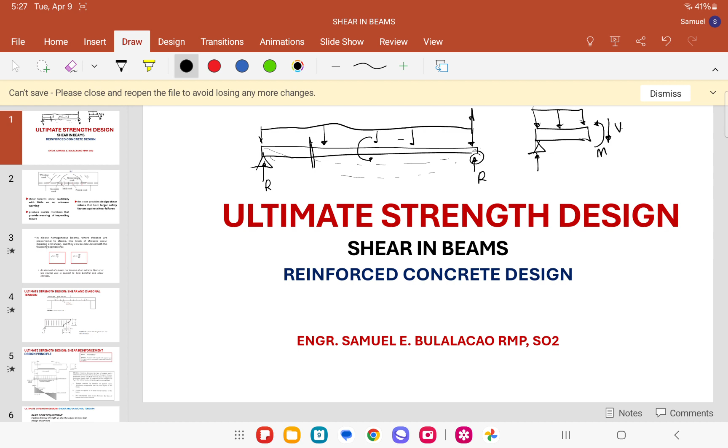So the beam must be designed for both types of forces to carry the load safely. So yung kino-consider nating una is yung flexure, no? So the reinforcement or the main reinforcement is a must to design. So next na lang dyan is yung additional reinforcement or the shear reinforcement. So yung shear failure natin may occur if wala tayong reinforcement or yung stirrups.

Ano ba yung stirrups natin? So kung meron tayong beam, meron tayong main reinforcement dito or main bars. Yung stirrups natin yan yung bakal na naka-yakap sa main bars. Ito na yung tatawagin nating shear reinforcement.

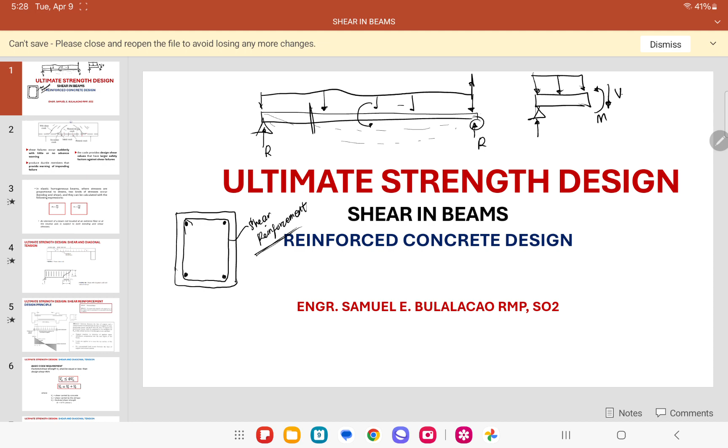So para di tayo mag-fail sa shear, kailangan nating i-design yung shear reinforcement. So paano naman nakakatulong itong shear reinforcement na to sa pag-resist ng shear loads? Check natin dito, tingin. So meron tayong... dismiss muna natin ito.

So meron tayong load na VU acting downward or V na shear load. So walang ibang mag-resist ng loads kundi yung mismong concrete, no? Tapos yung shear reinforcement. Bakit ko nasabing shear reinforcement? Kasi tingin dito, so we have yung shear natin is parang downward lang siya nag-act, no? So meaning kailangan may mag-resist na upward force. So itong bakal na to, ito.

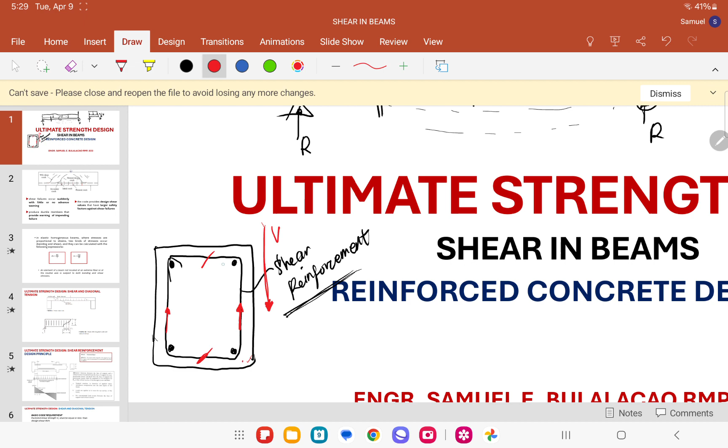So kapag hindi lang natin nakikita, pero may force yan na nag-resist dito. So meron tayong dalawang force, para mapigilan niya yung pagpunit nito, no? Para hindi maghiwa-hiwalay yung mga bakal na to. Kaya malaking tulong yung shear reinforcement natin.

So it is important to make certain that the design for shear must ensure that the failure does not occur before flexural failure. So dapat hindi mauna yung failure ng shear sa failure ng flexure. Yan, i-discuss natin with the help of NSCP 2015.

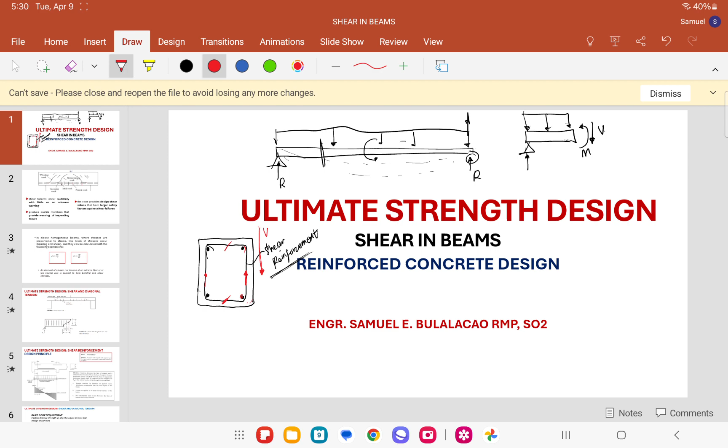Next, shear failures occur suddenly with little or no advance warning. Produce ductile members that provide warning of impending failure. The code provides the shear NSCP, there are safety factors against shear failures. So as you can see, meron tayong mga shear cracks dito na based from the laboratory, no?

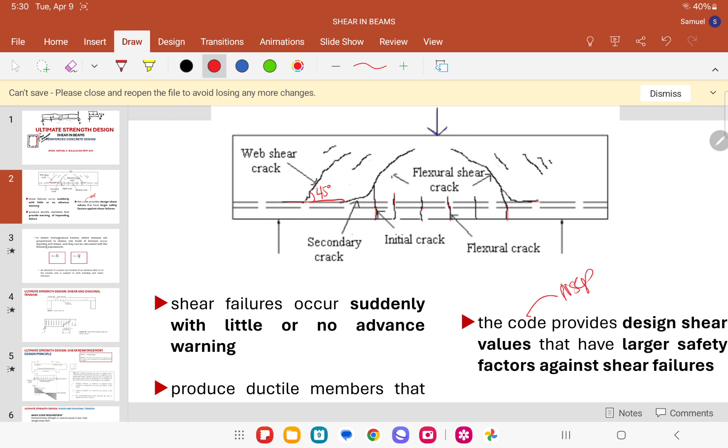Sabi 45 degrees daw yung cracks na to, no? Meron tayong web shear cracks, flexural cracks. Next, in elastic homogeneous beams where stresses are proportional to strains. Two kinds of stresses occur: we have the bending and the shear.

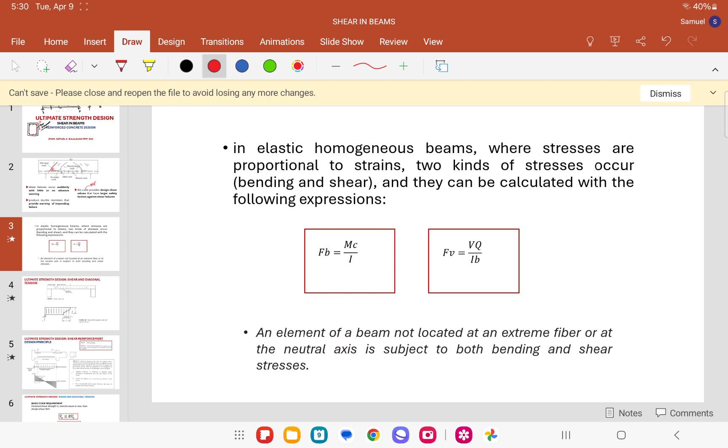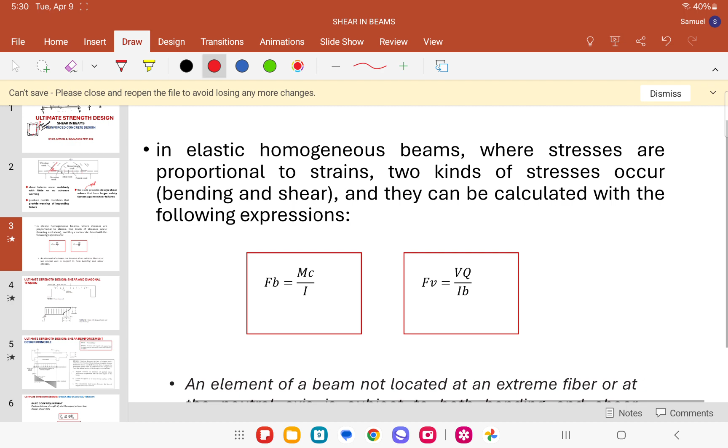So from your mechanics, we have the formula of bending na FB is equal to MC over I, or bending stress. But then we also have the shear stress na VQ over IB. So an element of a beam not located at an extreme fiber or at the neutral axis is subject to both bending and shear stresses.

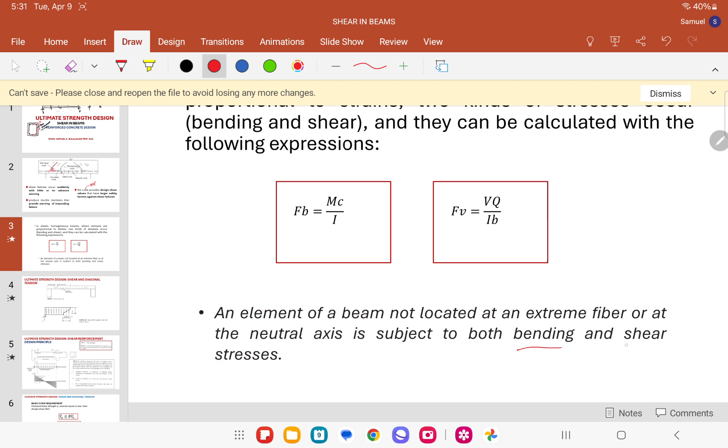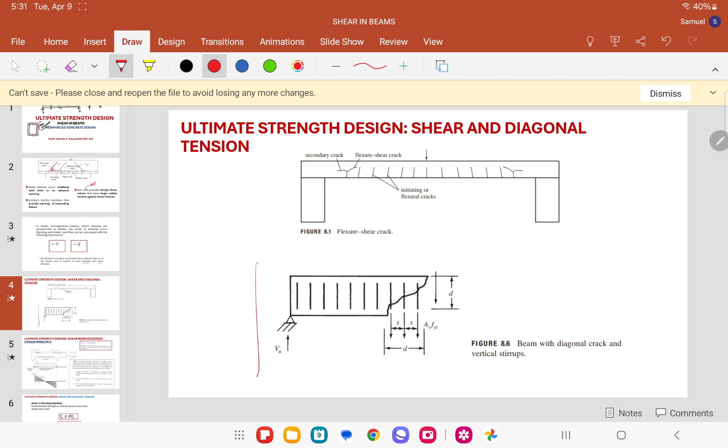So ito yung example ng flexure shear crack natin. So ito naman, example naman natin sa baba is the beam with diagonal crack and vertical stirrups. So yan.

May ano ata, sabi na. Hindi kasi siya ma-play. Ako na lang mag-play mamaya.

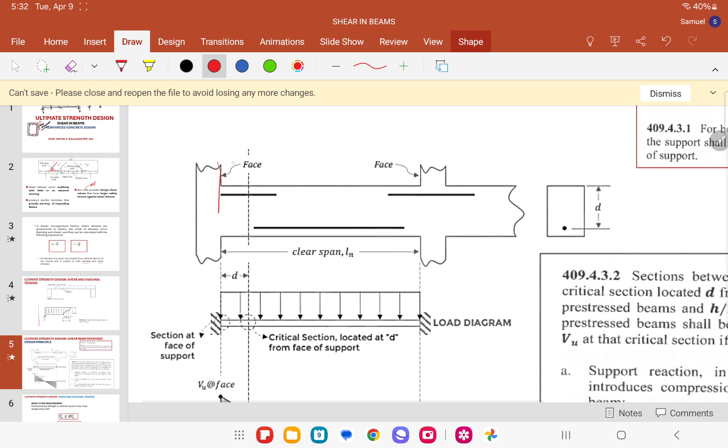As you can see in this figure, sabi dito sa NSCP natin, we have the factored shear. For beams built integrally with support VU, at the support shall be permitted to be calculated at the face of the support. So let's say na meron tayong beam na meron tayong support na columns. So of course yung columns natin merong face, so pwede nating masabi na meron ditong shear force at face.

So wherein, ang sabi, yung critical section natin is located at D from the face of the support. At itong D na to, di ba yan yung effective depth? Kung gusto nyo makuha yung critical shear force natin, kailangan lang natin kumuha ng distance ng D from the face. Tapos kaya natin mas compute na yung VU crit niya.

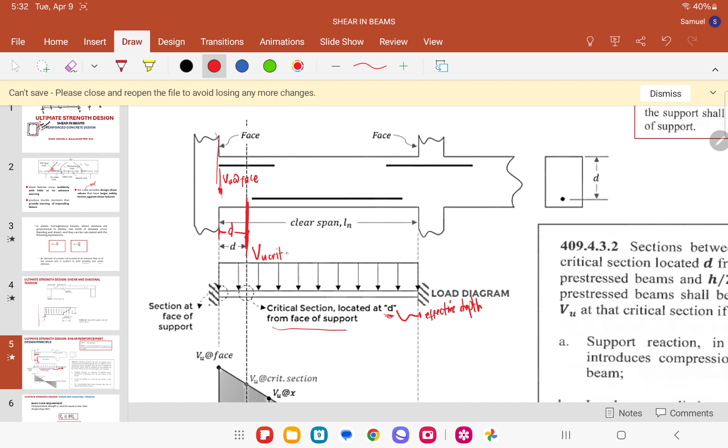Okay, so ito yung ganito yung itsura ng shear diagram natin. So meron tayong upward force dito sa may face since meron tayong reaction dito, no? Tapos 0 sa may gitnang part since wala na dyan load, no? So yung shear diagram niya is pag ganito lang.

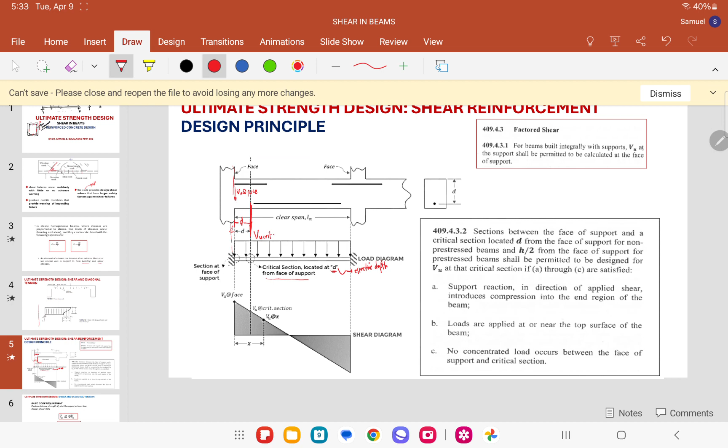So the section between the face, ito na yung sinabi ko sa inyong distance D. So lipat natin to dito. Wherein, ito na yung main equation natin.

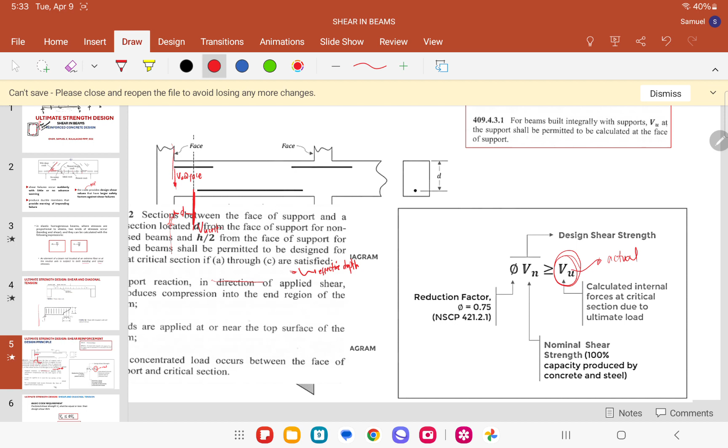We have the VN is greater than or equal to VU. So yung actual natin must be less than sa capacity or theoretical capacity natin. Kasi yung capacity, kung lalagpas tayo sa capacity natin, mag-fail na yan, no?

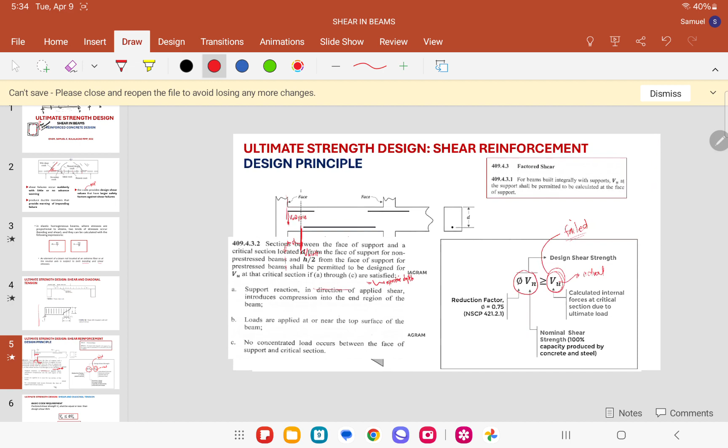Tama, so kunyari, yung kaya mo lang palang buhatin is 10 kilograms. So ang hina mo naman, no? Kaya mong buhatin is 10 kilograms, yan yung actual mo, ayun yung capacity mo pala. Tapos pinabuhat sa'yo is 11, so mag-fail ka na. Ganon yung analysis, okay? Ito na rin yun.

From NSCP, we have the basic code requirements. VU shall be equal or less than the design shear or the capacity, VN. Ito yung actual, ito yung capacity, ganito lang yun lahat, no? Pati yung MU natin must be less than or equal to the MN. So lahat. Wherein yung VN natin is equivalent to VC plus the VS.

Wherein yung VC natin is the shear carried by the concrete or the shear force carried by concrete, so it is in kilonewton. And also VS natin is the shear carried by the stirrups, it is also in kilonewton. So bakit itong dalawa? Kasi nga, di ba, kapag may beam tayo, ang magbubuhat lang ng shear natin is yung stirrups and then yung concrete mismo. Kaya pag pinagsama silang dalawa, ito na yung capacity niya.

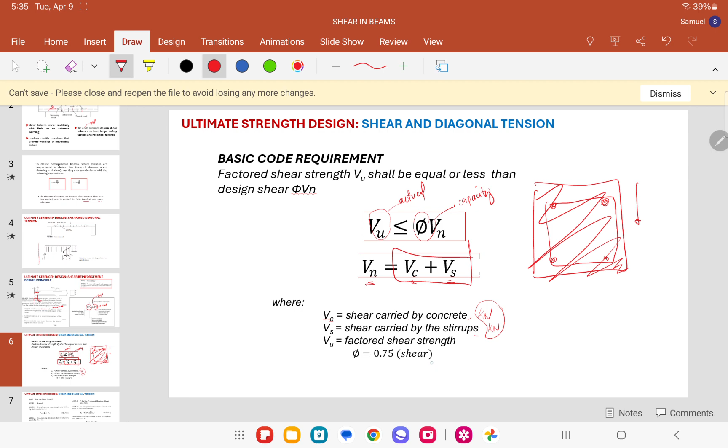Wherein yung VN is the nominal shear. Tapos yung phi natin is constant, we have phi in shear is 0.75. So we have here codes excerpt from the NSCP 2015.

So same lang ito, ito nakalagay nung kanina. So we have cross-sectional dimension shall be selected to satisfy the equation. So ito, kung makikita nyo, VC lang din siya. Tapos ito yung VS, no? VC plus VS.

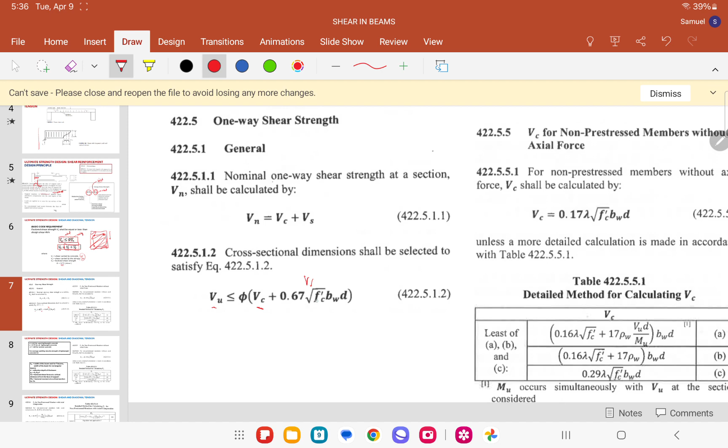0.67, o kapag minsan, 0.67 is equal to 2/3 also. Sa ibang book, 2/3 yung ginagamit. Sa NSCP, 0.67, so kahit ano dun.

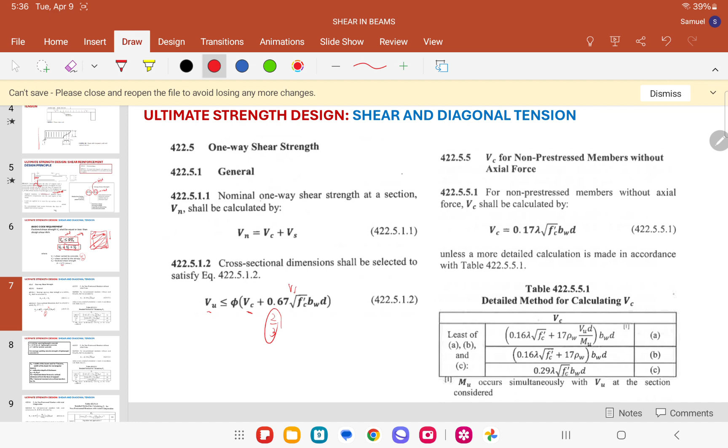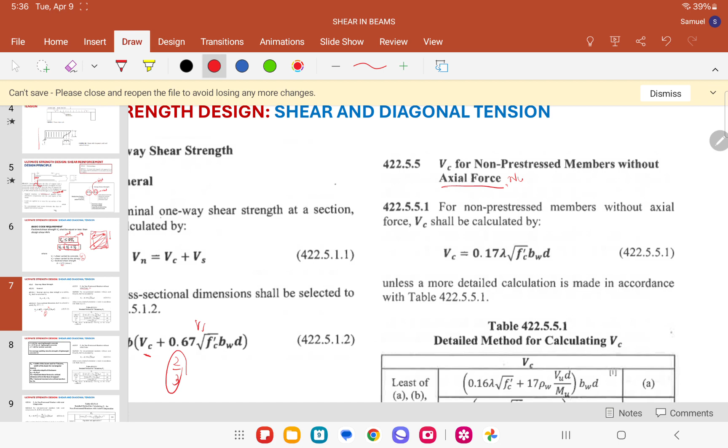So next, we have the VC for non-pre-stress members without axial force, NU. So yung axial force natin is kung meron kayong beam, dito naman siya nag-act mismo. Axial, parang normal.

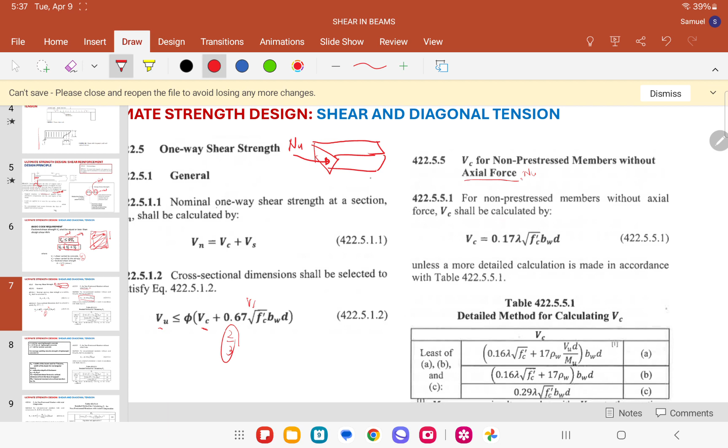So yung VC natin, shear strength provided by the concrete, we have 0.17 lambda FC prime BWD. For simplified naman to, kasi meron tayong next equation na detailed method for calculating VC. Sa kung may mga given kayo na VU and MU, ito yung gagamitin natin. Okay.

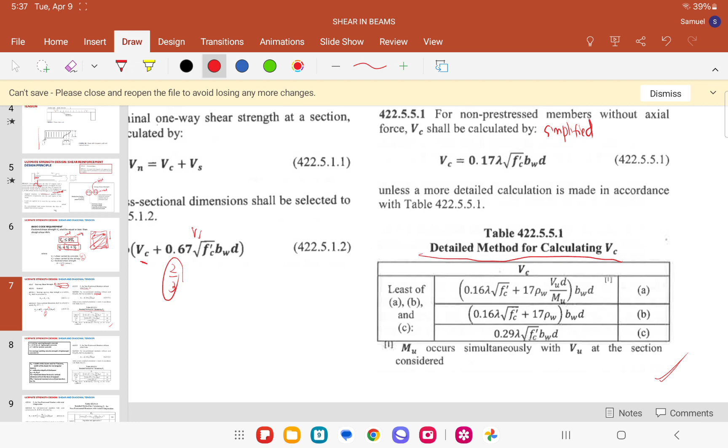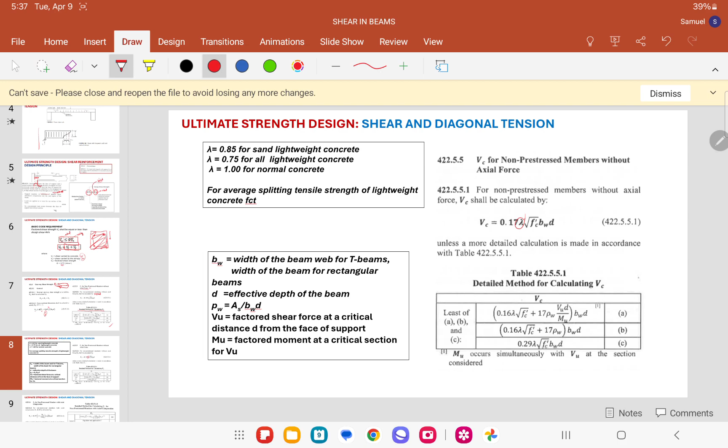So check nyo na lang. Wherein, yung lambda natin, ito, is equal to 0.85 for sand lightweight concrete, 0.75 for all lightweight concrete, and then 1 for the normal weight. So most typical na ginagamit natin sa lambda is just 1. So medyo nalimutan lang to, pero ito 1 lang kapag normal weight.

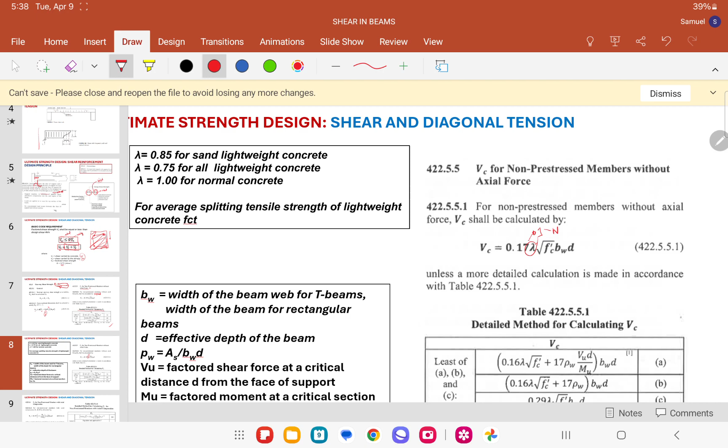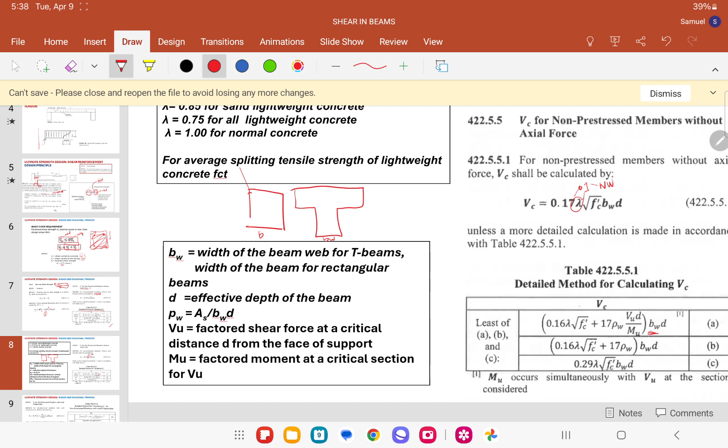Also, we have here the BW. Ito, kahit BW siya kasi naka-general yung equation natin. So pwede natin sabihin na pwede natin gawin na itong B natin sa rectangular, di ba? B lang siya. Pero kapag minsan kasi may mga instances na yung given natin is in T-beams. Kaya bini-BW siya, so equivalent lang naman yung BW tsaka B.

So and then we have the rho W, or kasi yung rho W natin is yung rho natin is AS over BD. So kaya nga naka-general W, so paglalagay tayo ng W dito. VU, factored shear force at critical distance. MU, factored moment at a critical section VU, ito, MU.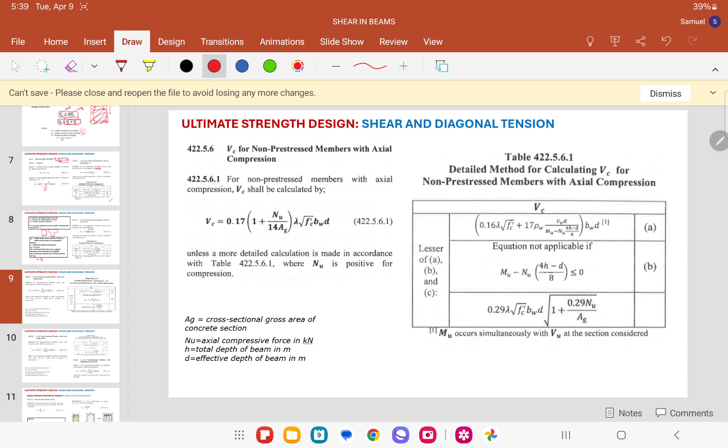So next, with axial naman tayo. So pag with axial, magdadagdag lang tayo ng NU, no? Axial compressive force. Ito na yung gagamitin yung formula.

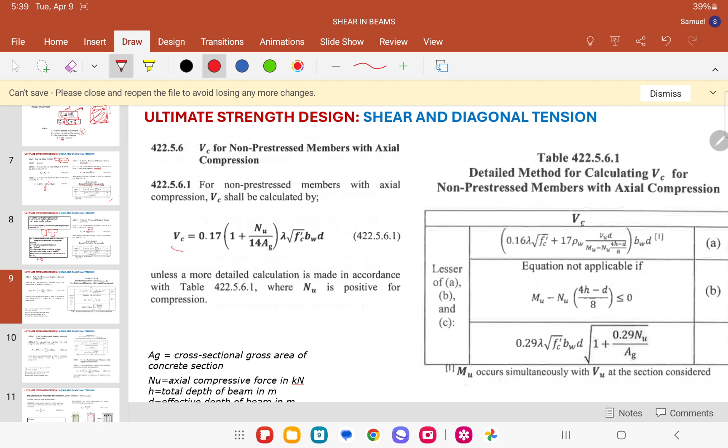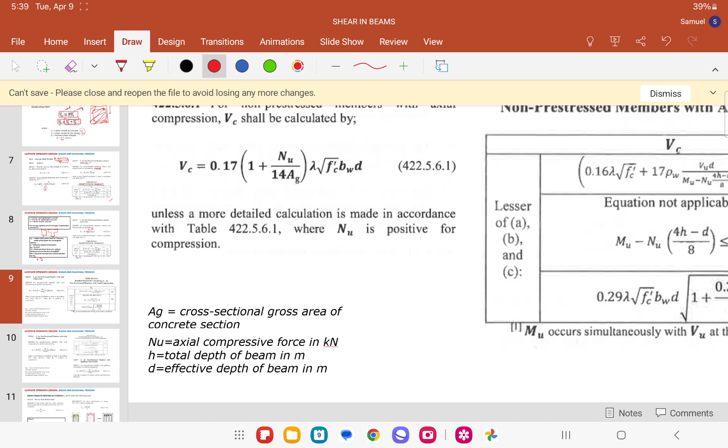Mostly hindi naman siya nakikita since sa beam natin is hindi naman parati may axial. Dito, NU is positive daw po for compression. So kapag given is tension, kunyari tension ay 10 kilonewton in tension, ilalagay nyo dito is negative 10.

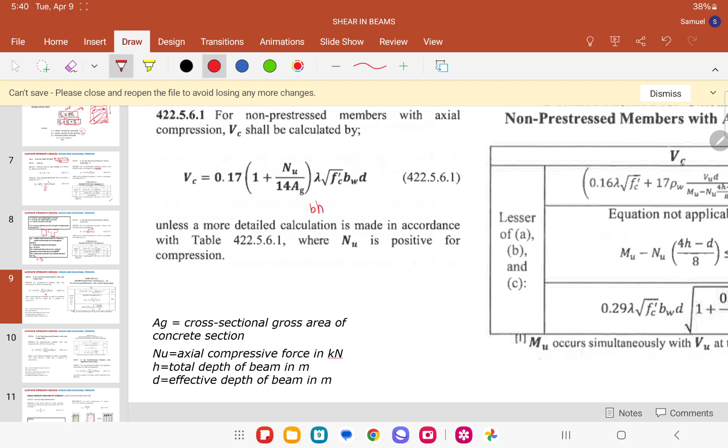We also have the AG, wherein yung AG natin is the cross-sectional gross area. So kung meron kayong width, hindi nyo i-multiply siya sa effective depth, no? Dapat sa H para maging AG siya. Tapos for detailed naman, ito yung simplified, tapos ito naman yung detailed. Same lang naman yung gagawin nyo, medyo mahaba lang ito.

We also have here VC for non-pre-stressed members with significant axial tension.

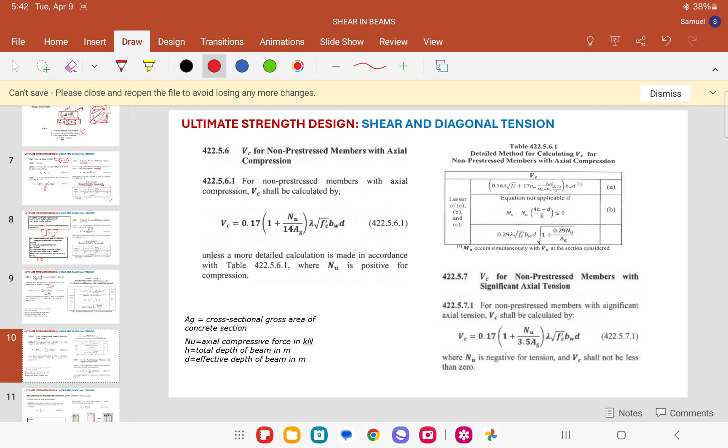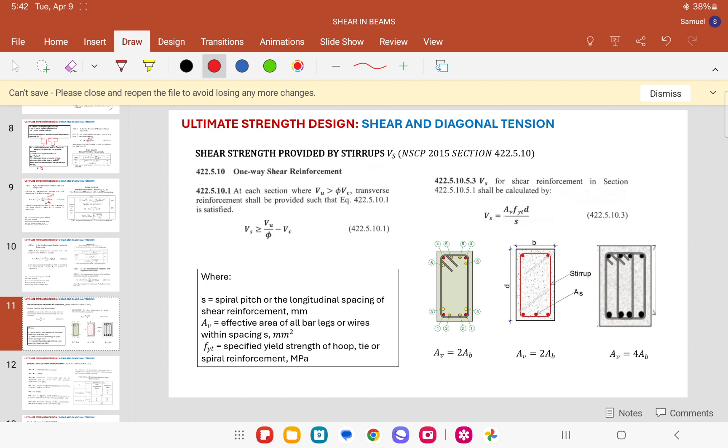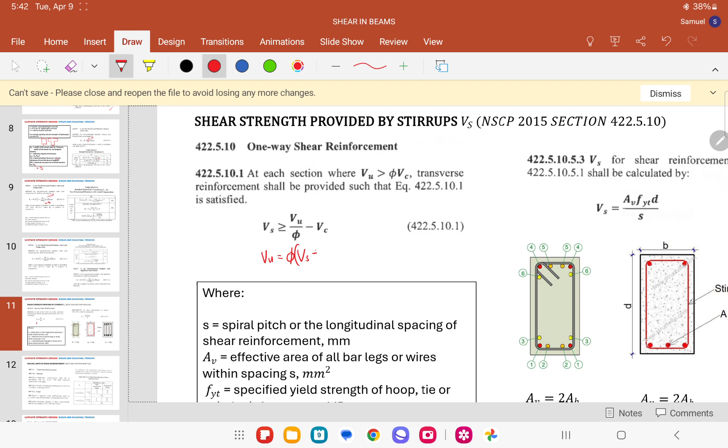Next, we have here the shear strength provided by these stirrups, wherein meron tayong formula ng VS na must be greater than or equal sa VU over phi minus VC. Ito galing lang siya sa VU is equal to phi VS plus VC, na lang na simplify.

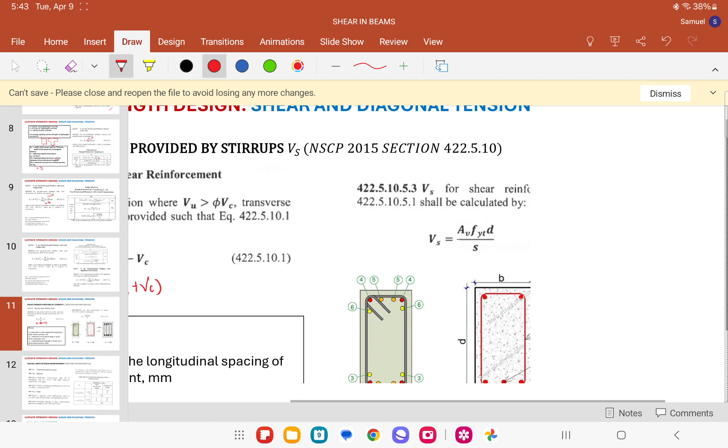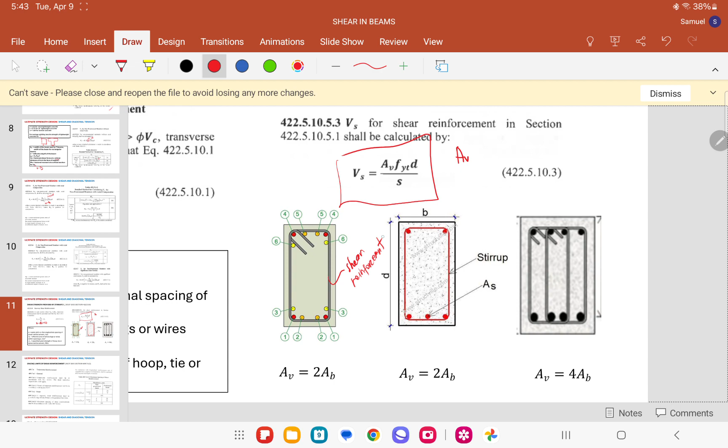Tapos meron tayong shear reinforcement. So you have the VS is equal to AV, FYT D over S, wherein yung AV natin is the area of this shear reinforcement. Yung area niyan is just the diameter area of these bars.

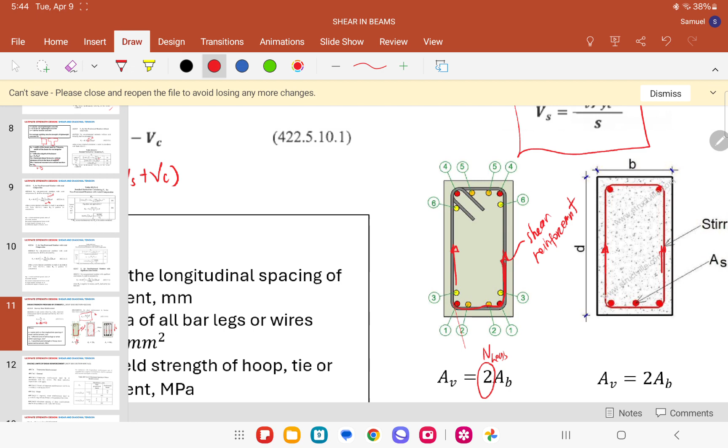So ano tong 2 na to? Yan yung number of legs natin, kasi di ba dalawa yung magkikerry. So dito magkano? Dalawa din. Kung dito naman, ilan? 4. So since meron tayong 1, 2, 3, 4, meaning yung number of legs natin, may check tayo kung parallel yung load. Yung parallel na number of bars, yan yung pipiliin natin. Kung pag ganito naman yung VU natin, sige, siyempre dalawa lang, 1, 2. Pero normally ganito yung tsura niyan. Pag hindi given, hindi sinabi sa problem, automatic dalawa yung pipiliin nyo.

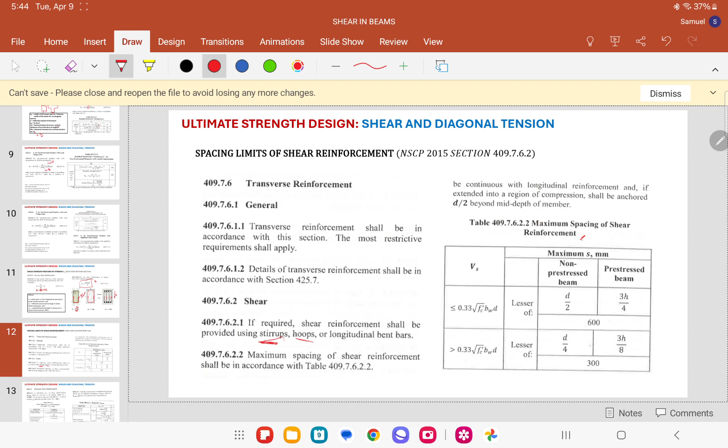We also have spacing limits for shear reinforcement. If required, shear reinforcement shall be provided using stirrups, hoops, or longitudinal bent bars. Meron tayo dito maximum spacing for shear reinforcement, ito yung VS natin, shear strength provided by these stirrups.

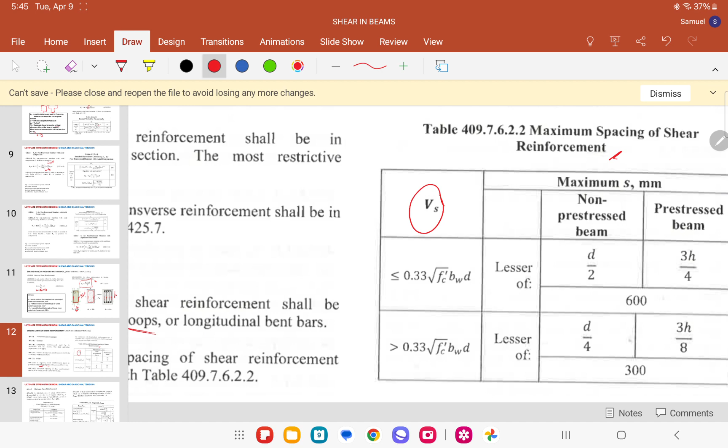Kapag less than, hindi pa naman malakas yung shear strength natin. Diba sa mga nakita na kayo ng mga construction site, naglalatag na sila ng beam. Kunyari ito yung beam, sa part na to masinsin yung pagkakalagay ng mga stirrups, until sa mga gitna siya magluluwag siya.

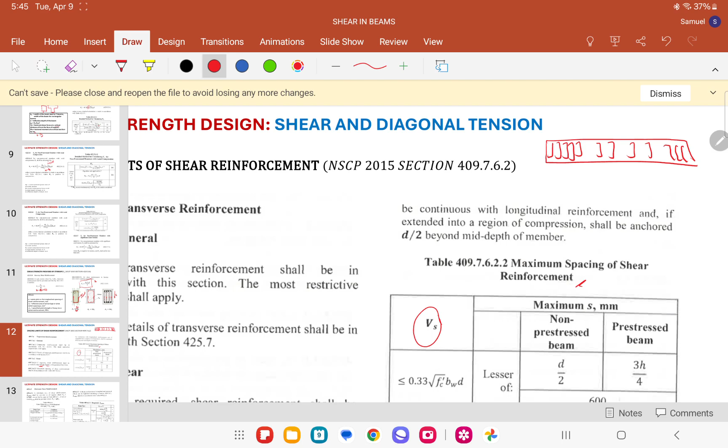Bakit kaya? As you can see, mas maganda kasi kapag mas malaki, di ba? Nakita nyo kanina yung shear diagram. Saan na yun? Shear diagram, where are you?

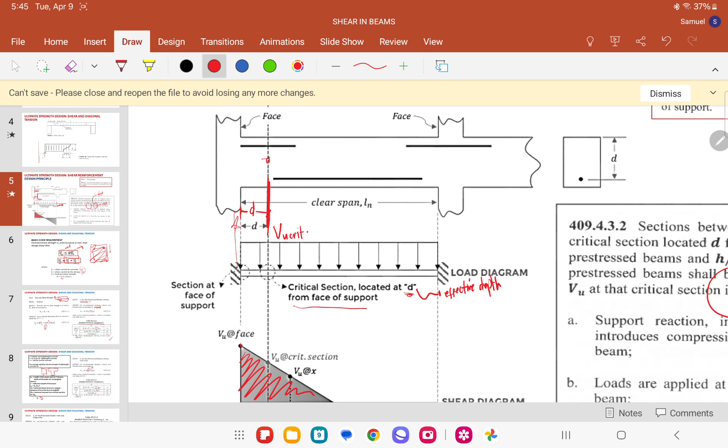Nakita yung shear diagram natin, sa may part ng face is mas malaki yung loads niya, no? Kaya kung naandito siya, yung stirrups natin dito is magkakadikit, parang pag ganyan siya, hanggang maggitna siya nagluluwag siya kasi dito wala naman nang shear force. Ang ibig sabihin, kapag mas malaki yung shear, mas maganda if mas masinsin or mas dikit-dikit yung pagkaka-spacing nila.

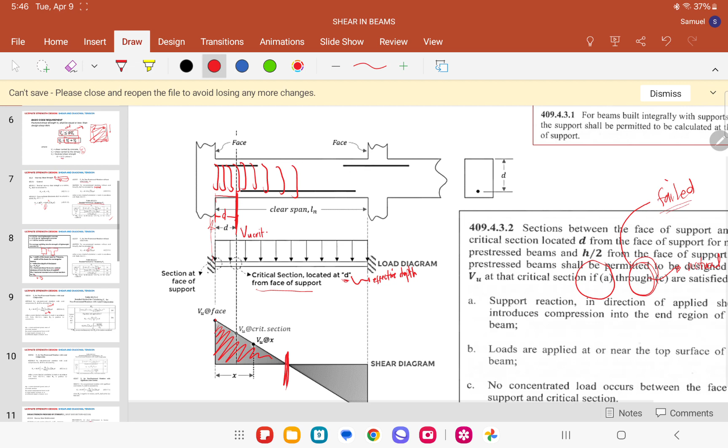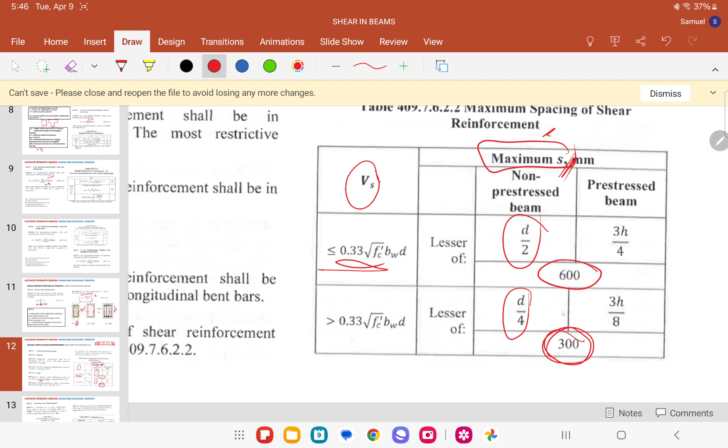Kaya dito, kapag less than, mas maluluwag yung spacing natin or the maximum S. Kapag malaki naman, dapat yung spacing natin is liitan natin, dapat hindi tayo lalagpas dito, ito yung maximum na. So kung may mga compute tayong theoretical na spacing natin, kapag lumampas siya dito, automatic, ito lang yung magpipili na lang tayo dito sa dalawa.

Wherein meron tayong shear reinforcement na ito, minimum shear reinforcement, required Av,min. For the minimum, ito na yung gagamitin natin, greater of these two sa Av,min, over S siya, no? Pag nilipat natin, pwede na ilagay dyan.

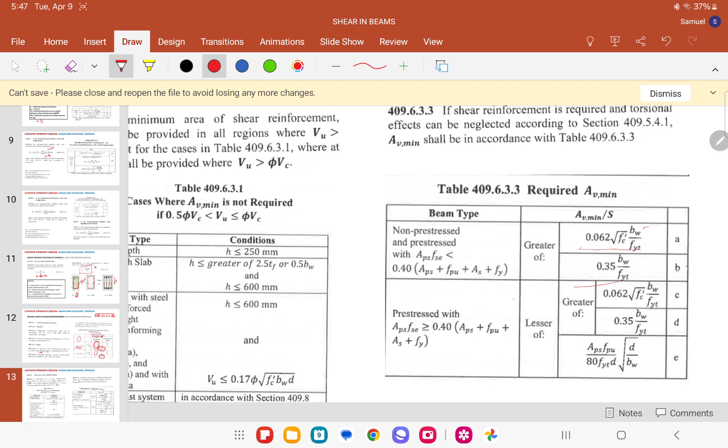Okay, so meron tayo ditong steps in vertical stirrup design. Paano natin ma-compute yung S? Parang ganun, kasi sa mga problem na to, S lang yung mostly na kinocompute natin.

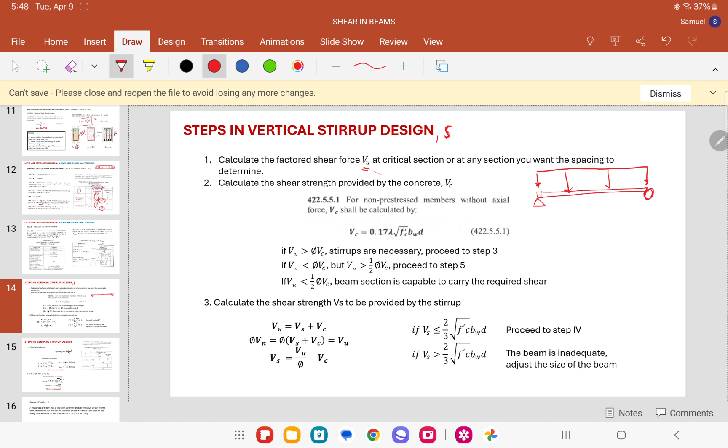First, calculate the VU, shear force VU. To calculate, kunyari may binigay sa inyong beam, simply supported, tapos meron daw W na load dito or W na naka-factored na siya. Kailangan nyo kasing ma-compute is factored shear force VU, at critical section. Di ba sabi ko kanina, yung critical section is from the face of the support, from distance D, yan na yung VU natin.

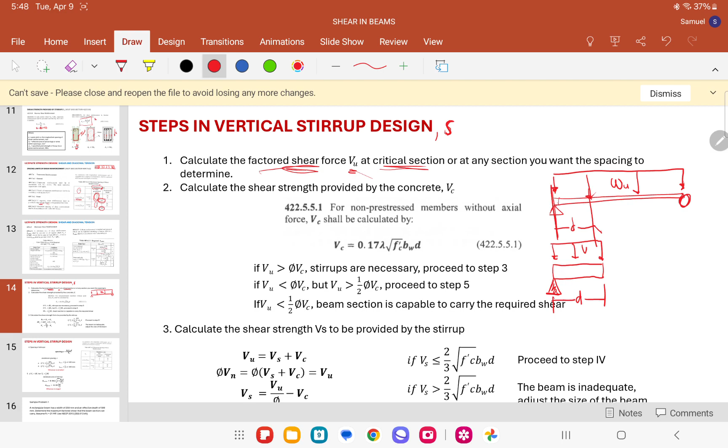Meaning, magkakat tayo dito ng beam na may distance na D. Kunyari may load ka dito, tapos naandito na yung shear force mo, VU. So of course dito, meron tayong reaction, kailangan nyo din i-consider yung reaction dito.

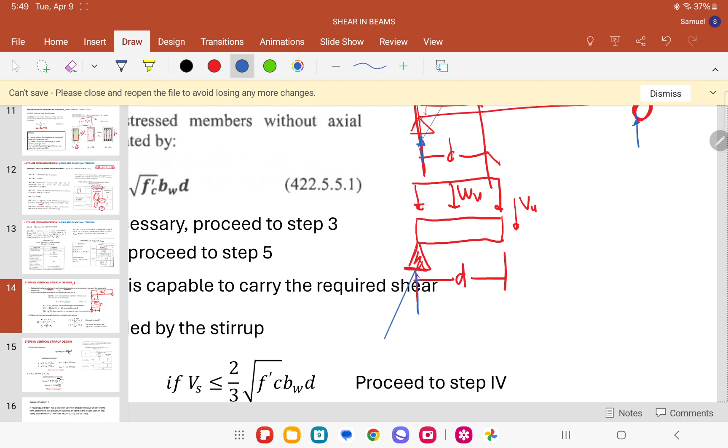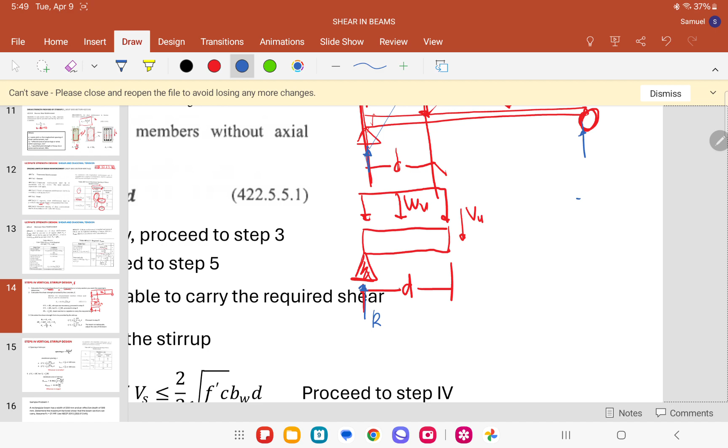To compute for VU, summation of forces, vertical. Ano ba ang nangyari dito? Summation forces, vertical.

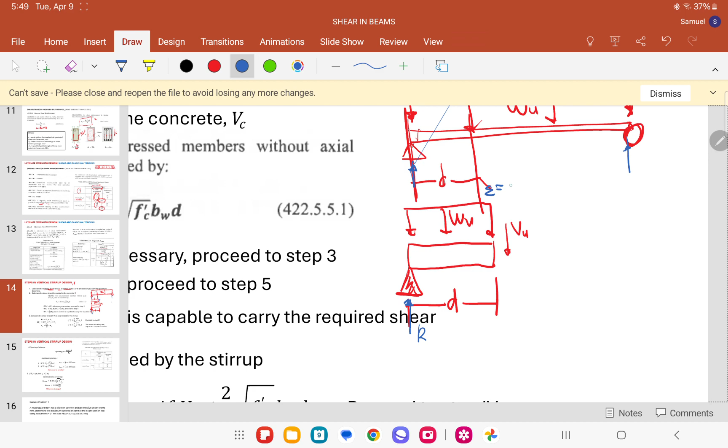Saglit lang ha. So, we have the reaction na upward minus yung VU natin na downward, tapos yung uniform load na Wu times d equal to 0. So, of course, yung R niyo o yung reaction niyo ay makukumpleto niyo naman, no? So, with this, given na siya, ito given naman, VU na lang ang matitira. So, make sure lang na factored yung given sa inyo.

Kapag hindi factored, you may use 1.2 DL plus 1.6 LL, for 2015 yan, no? Yan, erase natin.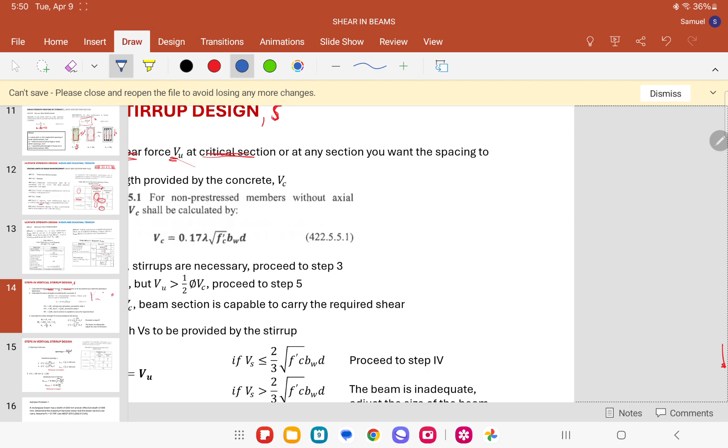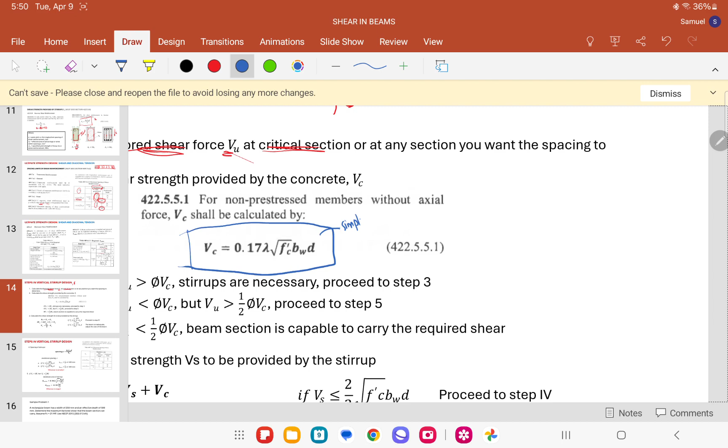Next step is to calculate the shear strength provided by the concrete. Kapag hindi sinabi, ito na yung gagamitin niyo, wherein ito yung simplified. Tapos may condition dito, compare niyo lang yung VU niyo sa value ng phi Vc.

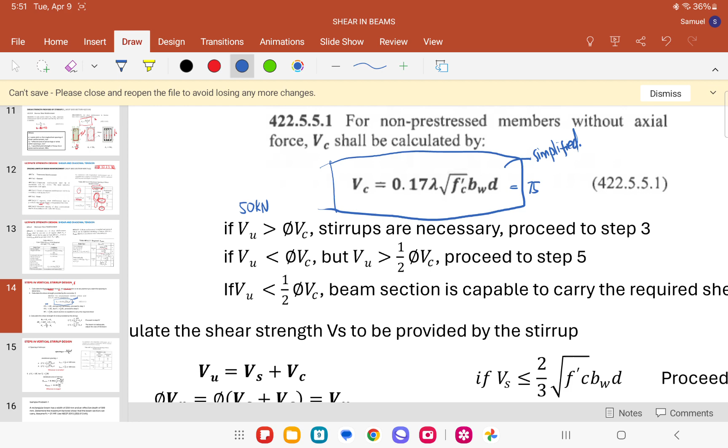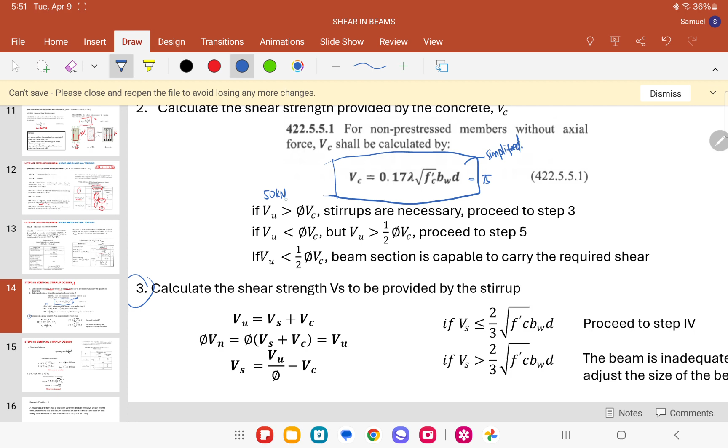Kapag nag-less than naman siya sa phi Vc, so mag-check din kayo muna ng 1/2 phi Vc. Kapag greater than, yung VU niyo sa 1/2 phi Vc, proceed kayo sa step 5 na nasa next slide. Kapag less than naman siya, kayang-kaya niya na daw i-carry yung shear natin. So, medyo mababa lang yung shear force kapag mga ganito.

So, next, calculate the shear strength Vs provided by the stirrup, wherein ito na yung formula natin.

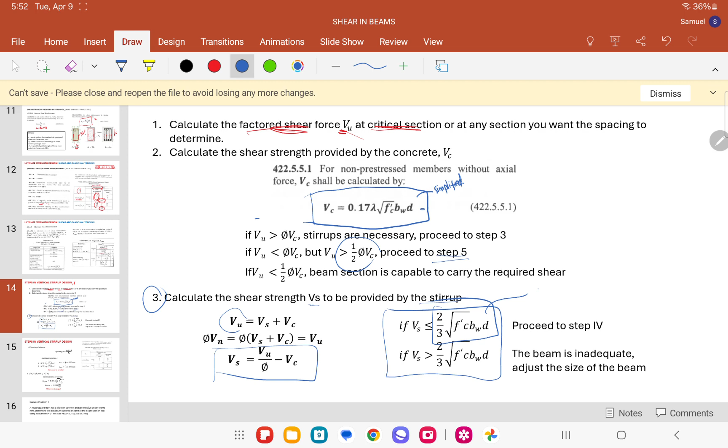So kapag na-compute na tayo ng Vs, kapag hindi given yung Vu natin, kunyari hinahanap natin ay Vu, kukuha tayo ng formula ng Vs galing dito. Ito na yung theoretical or capacity natin, 2/3 square root of Fc prime BWD.

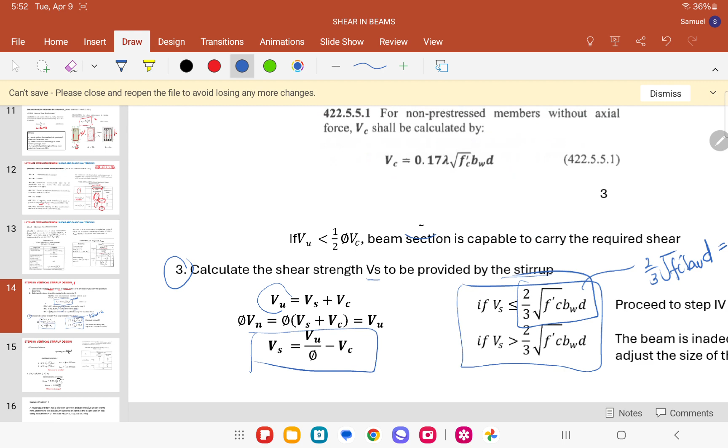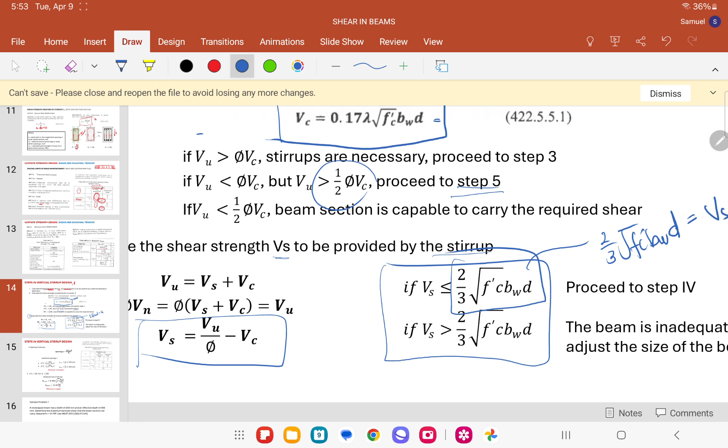So, of course, kapag ganito yung hinanap natin, S, ito na yung problem, ito na yung mismong step. So, meaning, given itong Vu. So, compare lang natin yung Vs sa 2/3 Fc prime BWD. Kapag less than, proceed to step 4. Kapag greater than naman siya, ito na yung sagot niyo: the beam is inadequate, you need to adjust the size of the beam.

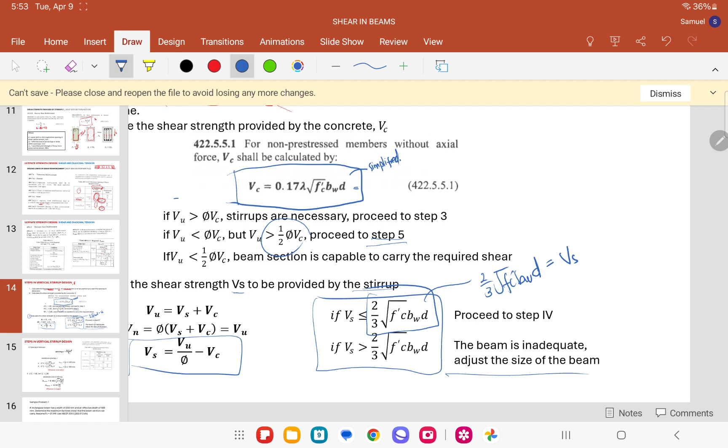So, okay, next is to calculate the spacing of stirrups. You have your AV, area of reinforcement, FYT na given, and then the D, and then the VS na compute lang.

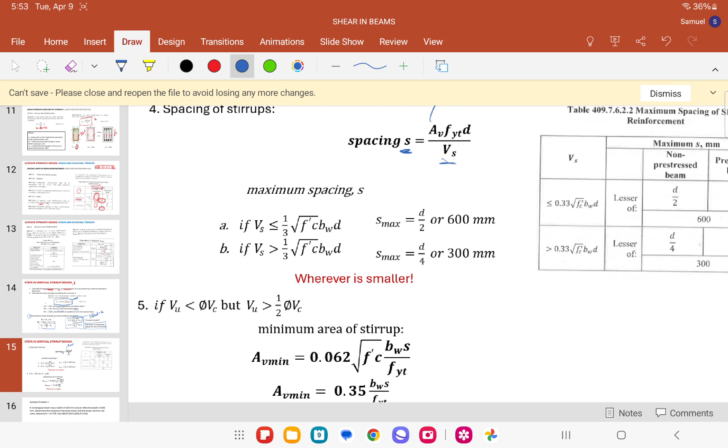So, of course, you need to check for the maximum spacing S, wherein i-check niyo yung value ng VS niyo into 1/3 naman. So, kapag less than, meaning, yung mas maganda ditong analyzation ay kapag less than, maliit lang yun, no? Kapag nag-less than siya o mas maliit, luluwagan natin yung spacing natin.

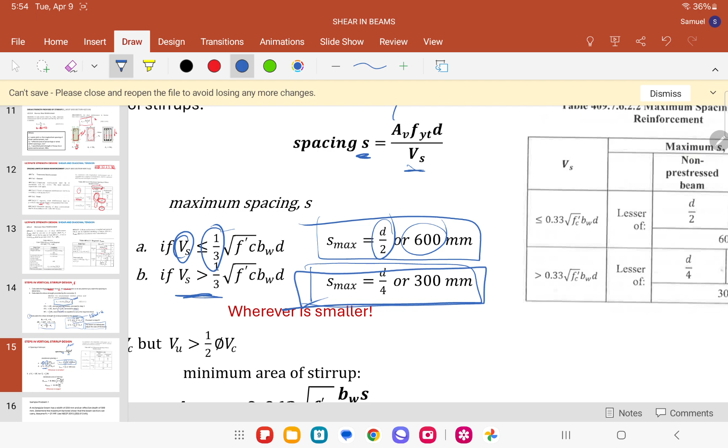So, meaning, gagamitin natin ay 600 o D/2. Tama, no? Kapag greater than naman siya, so meaning, mas malaki yung force natin, so liliitan natin yung distance, yung spacing natin, para makarry niya yung load. So, dito, wherever is smaller.

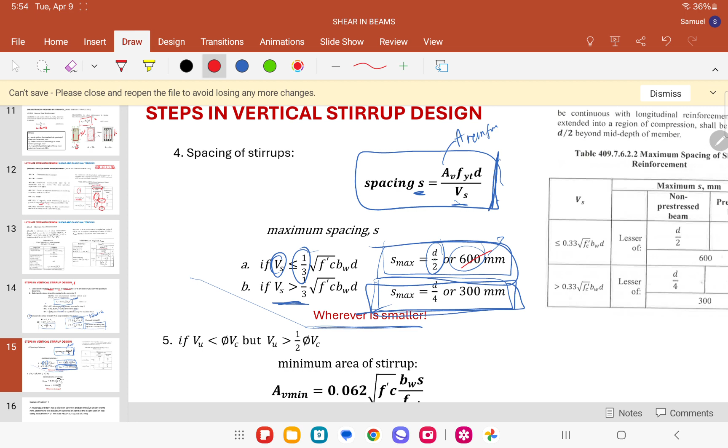So, bale, tatlo lang yung pagpipilian niyo: ito, o alin dito sa dalawa. Kunyari, nag-less than siya, ito lang yung pagpipilian, yung tatlo: 600, D/2, and itong mismong spacing. So, kung alin yung mas maliit diyan, yan yung kukunin niyo.

Tapos, ito na din yung step 5 na galing dito sa step number 2. Kapag nasatisfy niyo itong condition na ito, dito na kayo papasok. So, makakompute kayo ng S galing dito.

So, yung AV min niyo dito ay yung area ng V niyo na din na nagagamit, yung area of reinforcement. So, makakompute kayo ng S, both. So, alin yung mas maliit, compare niyo din. Tapos, since naka-AV min na siya, minimum na lang, maliit na lang yung force diyan.

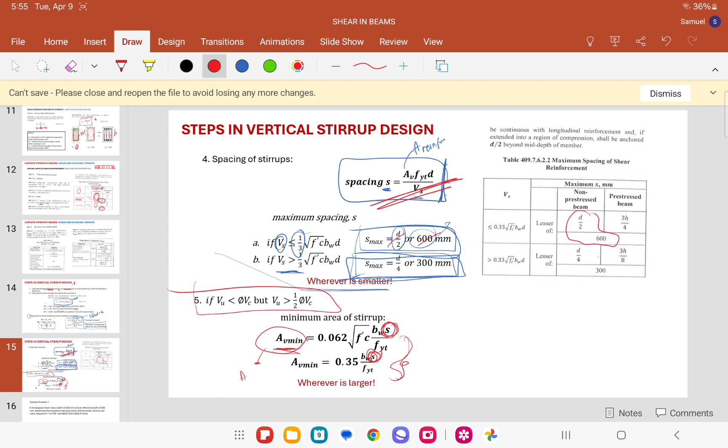So, of course, yung gagamitin, yung maximum spacing ay yung malaki, no? So, kunyari, nakakompute na kayo ng S. Of course, kapag spacing, smaller, wherever is smaller, always small na lang, always small yung pipiliin, no?

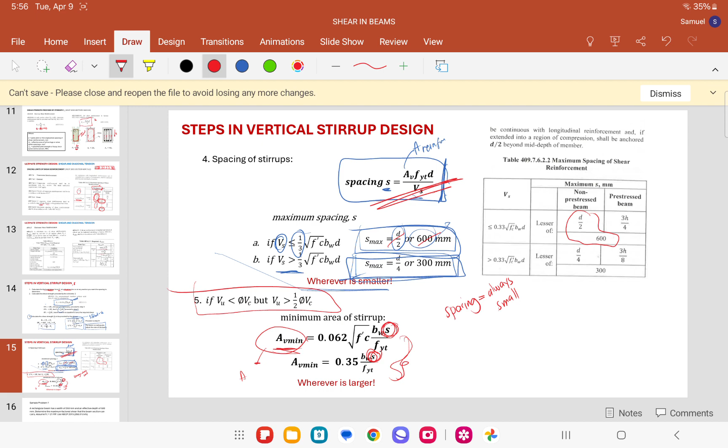So, yan. Yan na yung steps in vertical stirrup design. Mag-upload tayo ng example niyan for your reference din. Thank you.